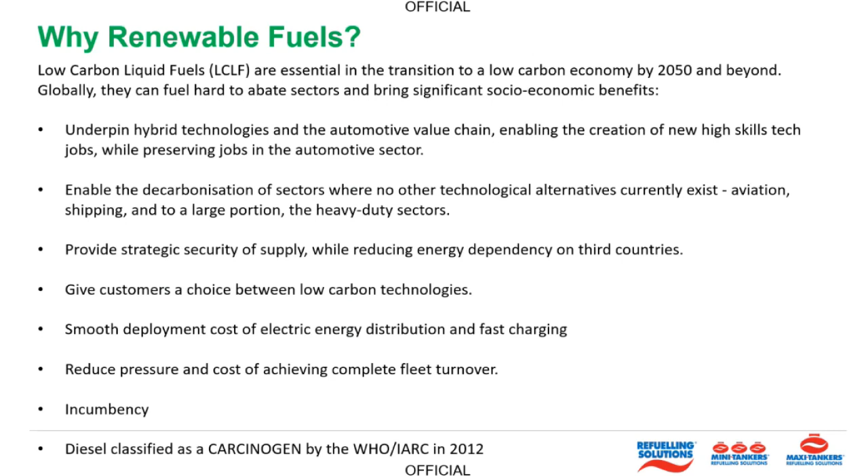I think we know what biodiesel is. It's not straight vegetable oil or used oil. Biodiesel today, although it may be made by some backyard enthusiasts and unregulated, the poor quality units of the past are long gone. Australia has 3 local biodiesel manufacturing facilities in the country, and that's a small percentage compared to the diesel users.

The historical issues with biodiesel have been inconsistent and multi-feedstock, so the quality of the feedstock is crucial to a good end product. There was a distinct lack of quality control. There was no adherence to the fuel standards or OEM support for inferior quality, and rightly so. And initially, biodiesel that was made in Australia or used in Australia resulted in filter blockages in cold temperatures, fuel efficiency issues, and power loss issues.

So the process of biodiesel manufacture was transesterification, and that's the most common form of biofuel used in the US and Europe as a replacement for diesel. It can be used as a fuel for vehicles in its pure form, but it is usually blended to reduce levels of particulates, carbon monoxide, and hydrocarbons. And although there are an increasing number of OEMs, original equipment manufacturers, supporting the use of B100 in their equipment, that's still a small percentage of manufacturers globally.

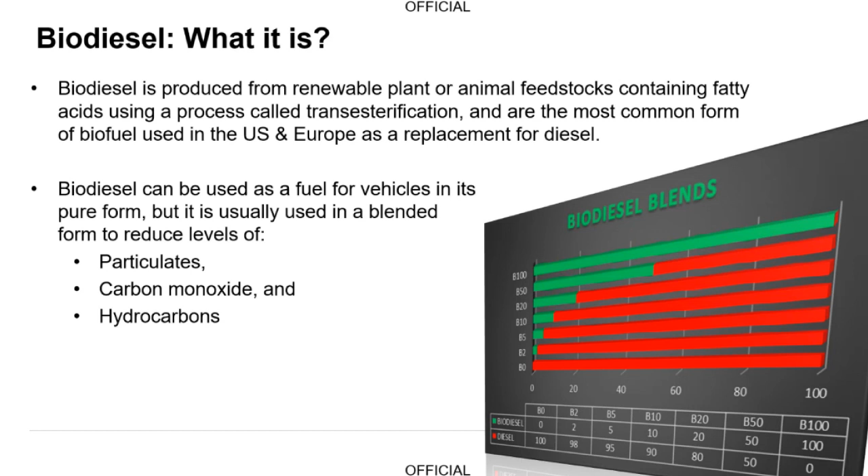The consistent message is that all diesel engines manufactured globally will run on a 5% blend, and then there are increasing percentages that are coming up to a 20% blend, depending on, once again, the quality of the product or the type of feedstock that's being used.

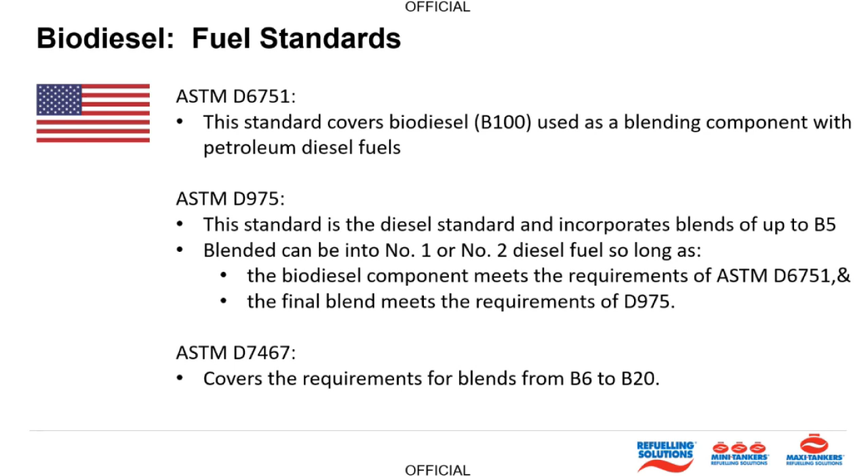Biodiesel fuel standards: traditionally it's the ASTM D6751 that covers the B100 that's made for blending with petroleum diesel, and the next standard, the D975, is the standard that incorporates blends up to 5%, and the third one covers the requirement for blends from B6 to B20. Now that's an American standard, and our Australian standard is essentially a combination of the ASTM and the EN 14214 European standard.

BQ 9000 is a quality accreditation. It's particular to the United States and Canada, and that's open to any biodiesel manufacturer, marketer or distributor as a proof of quality or a quality assurance.

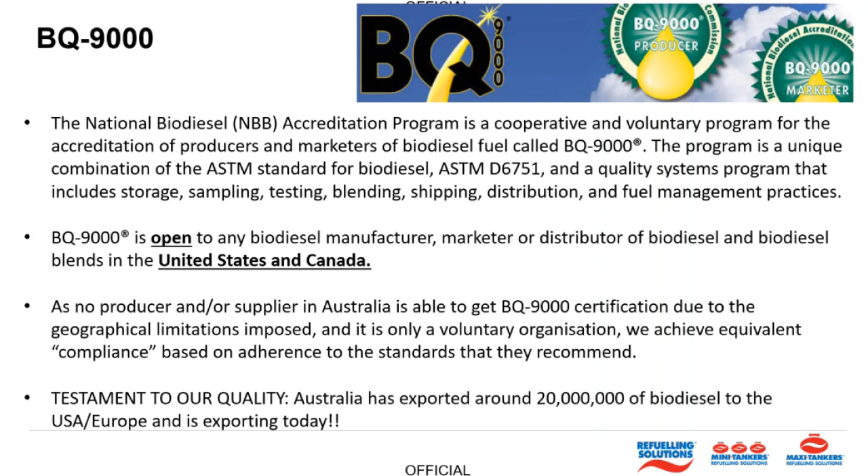There's no BQ 9000 in Australia, and yet the manufacturers adhere to those standards and have that inherent quality control anyway. The fuel standard there is the EN 14214. That's the European standard. So as I said, our Australian standards, that's the Australian standard, which is the Fuel Quality Standards Biodiesel Determination 2019, and the Fuel Quality Standards for Automotive Diesel Determination.

So in summary, that B100 that is supplied in Australia as part of the B5 blend, and that our Australian standard allows for 5% biodiesel in all diesel sold in Australia, providing that B100 conforms to the ASTM D6751 and 14214.

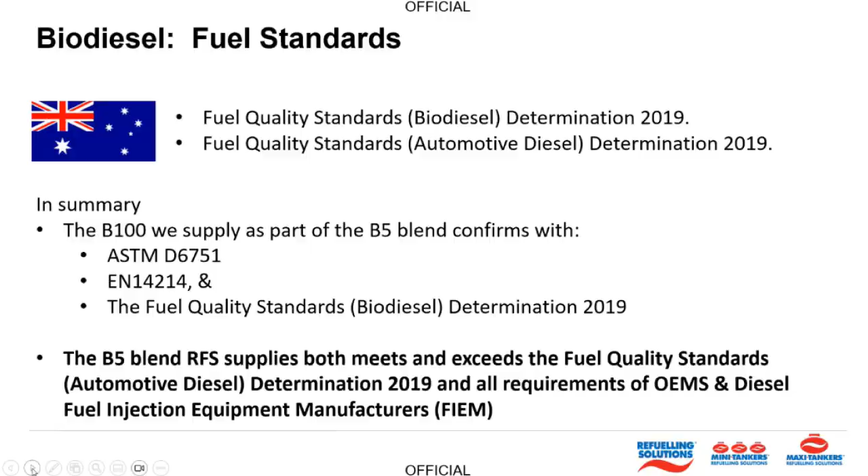So the B5 that is manufactured or we supply in Australia both meets and exceeds the fuel quality standards for straight mineral diesel, and is considered, for all intents and purposes, exactly the same as your standard diesel. And that's the actual Commonwealth document that shows that 5% in that standard.

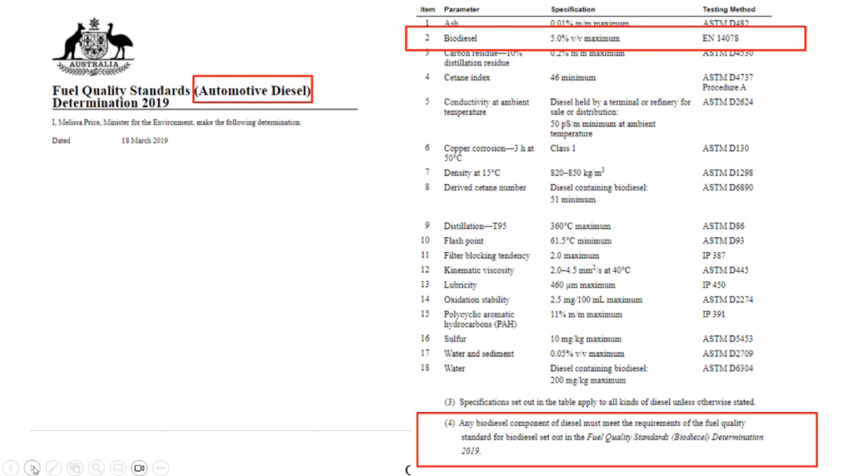Essentially, there is a biodiesel handling and use guide that is adhered to in Australia, and quality is far superior today than what it was 15, 20 years ago when the industry was in its infancy. I think we all know the benefits of biodiesel, and that it does improve air quality. It addresses climate change by reducing greenhouse gas emissions.

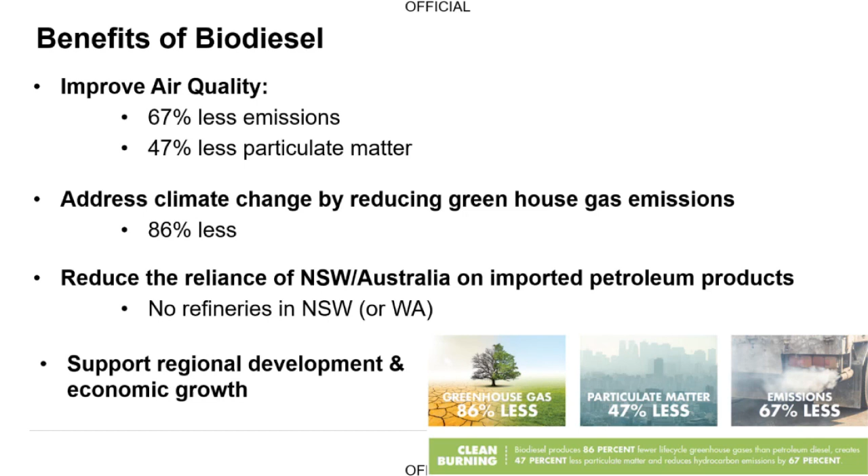And importantly for Australian agriculture and manufacture is that if we can produce any percentage of low carbon liquid fuels in Australia, we are reducing Australia's reliance on imported petroleum products. There has been a vacating of the manufacturing industry throughout Australia generally, but with the fuel, if we can have some fuel security in Australia by supporting local manufacturing of a bio-based fuel from varying feedstocks, and that's forever evolving, that will also support regional development and economic growth.

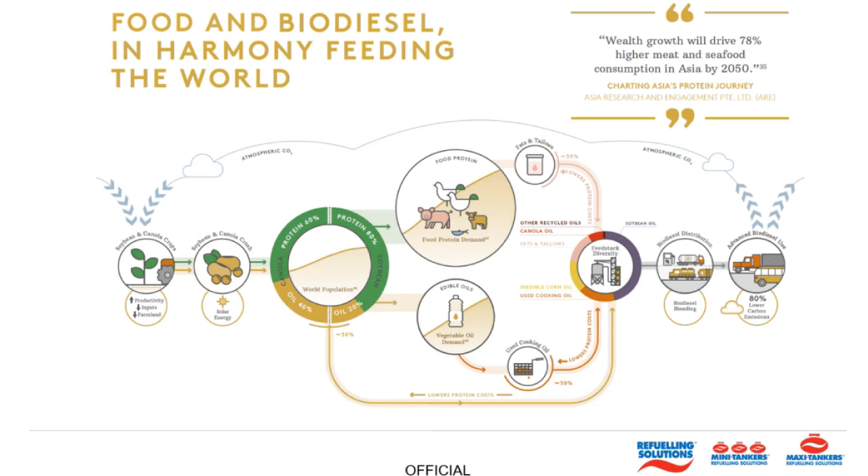The argument of food versus fuel has been one that's been around for the last 15, 20 years and will continue to do so. And we're not advocating that we use food crops for energy crops, and whatever feedstock is used for energy has to be sustainable. So it depends on both the ratio, whether the feedstock is from marginalised cropping areas, land, or new technologies like algae, for instance, or a combination thereof. You can actually have food and fuel, as a replacement for the mineral diesel that the world is now pivoting away from.

Okay, proven performance. We are now seeing, with the advent of renewable diesel, that's HVO, hydro-treated vegetable oil, it's one step up from the initial biodiesel offerings that were made 15 or 20 years ago. HVO is chemically indistinguishable to mineral diesel, and it has the same proven performance. And biodiesel itself has improved dramatically, and it also has almost the same performance as the mineral diesel, unlike the initial offerings in the past.

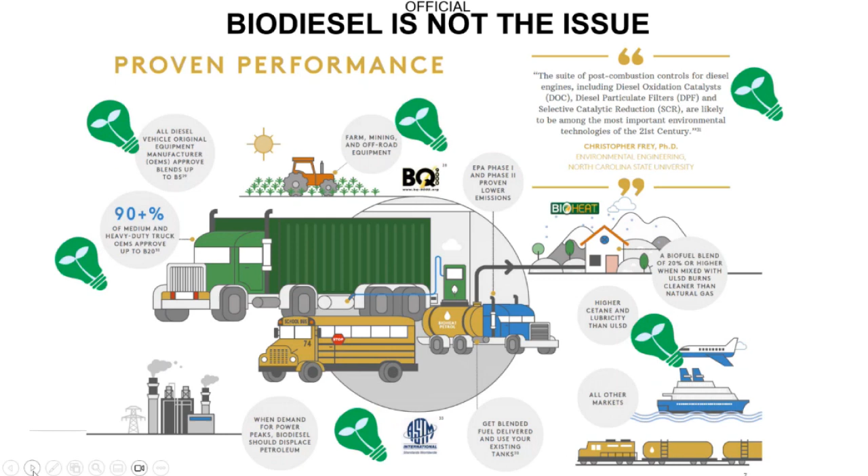Current producers in Australia, and there are 3 only, with a capacity as you can see on the slide: Ecotech, based in Narangba, Queensland. Scanline are based at Rutherford, in the Lower Hunter, New South Wales. And Just Biodiesel based at Barnawartha, which is just over the Albury-Wodonga border.

There's a combined total of 105 million litres against a current consumption in Australia of, I think it's 32 billion litres of diesel. So we'll never be able to have enough bio-based liquid fuel to replace the consumption of mineral diesel in its current form. However, on the road to decarbonisation, as newer technologies take place, we can still utilise a lower carbon alternative in a blend or straight to help that journey along.

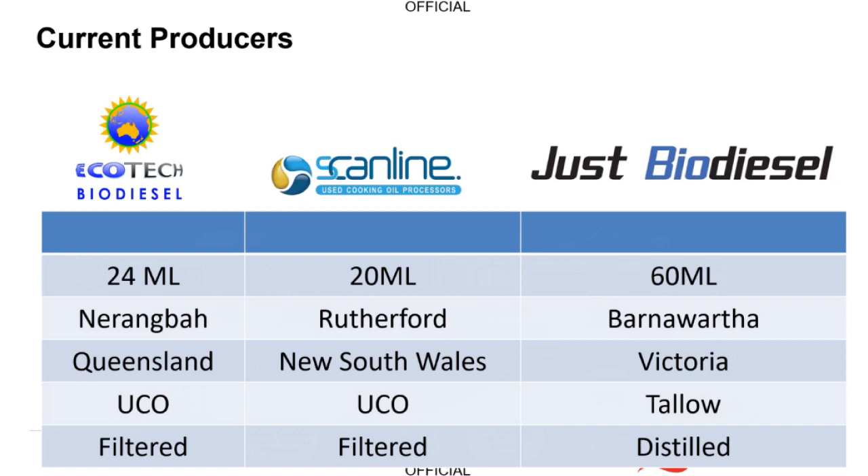Currently, Refuelling Solutions, we started importing renewable diesel, or Neste My Renewable Diesel. The first import was from Finland, where it was manufactured, and currently we're importing it from their refinery in Singapore.

And the silly point of this, well, I find it very frustrating, is that the renewable diesel that we're now bringing into the country and advancing as a solution, or as a part solution to decarbonisation, was made from feedstock that Neste procured in Australia, took overseas and manufactured and sent it back. We brought it back into the country as an end product.

Australia has the innate capability and conditions to manufacture from a variety of feedstock into its own renewable diesel, and that really is the end game in my view, and obtaining support, both regulatory support and state and federal support for both investment, and incentivise those to invest to manufacture an Australian homegrown product, bio-based product for consumption in Australia, and also incentivise end users for using that. And that's where the sticking point has been.

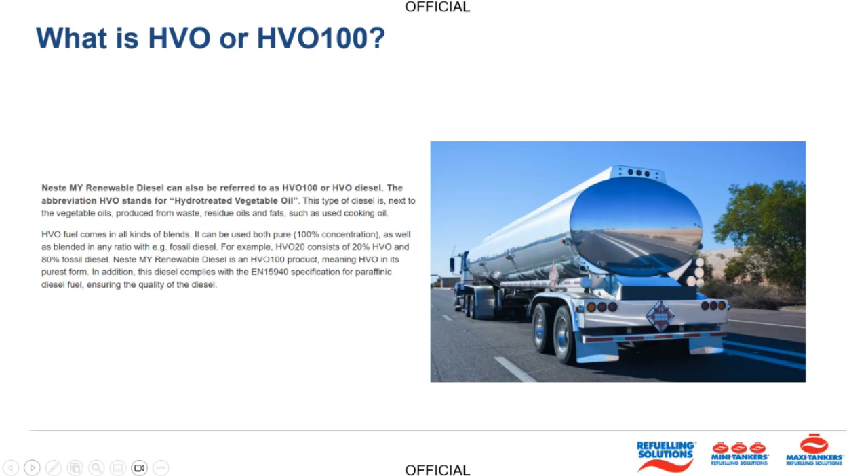My hope and desire is to see Australia become maybe not self-sufficient in a low carbon liquid fuel, but certainly go a long way to gaining some security and foster a new industry. We can manufacture, we can produce the product, and it will play a role as one technology on the road to decarbonisation.

The benefits of HVO: emissions can be reduced by up to 90% over the fuel's life cycle compared to fossil diesel. I guess that changes when we're importing it from Finland or from Singapore by a vessel that's using mineral diesel, but that life cycle analysis will apply if we're manufacturing in Australia. Certainly helps tailpipe emissions in a mining situation or a closed room generator type at the bottom of a building. Air quality is improved.

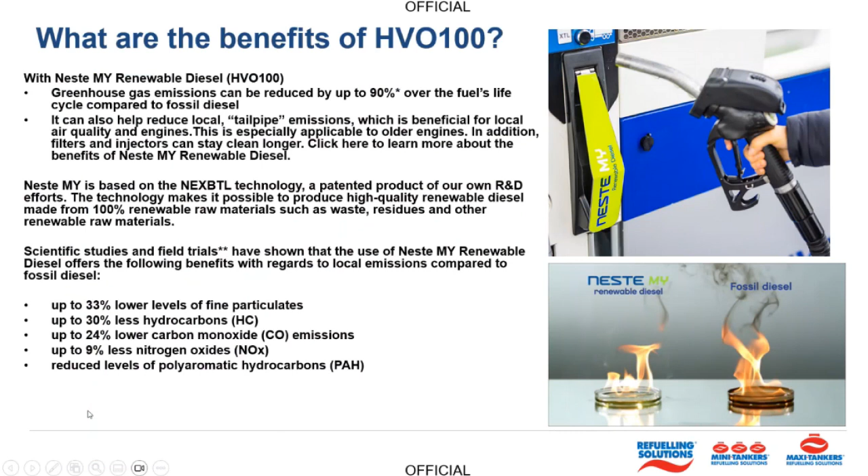HVO or biodiesel itself is not considered a carcinogen, as is straight diesel or the fumes from burning that. Yeah, there it is. You're welcome to have this presentation to go through the numbers on the fine particulates, the hydrocarbons, NOx, CO reductions, and the polyaromatic hydrocarbons that are reduced.

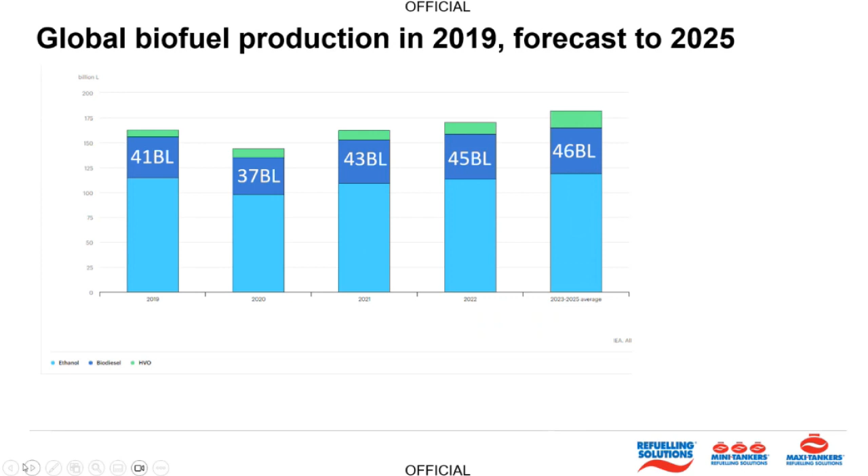Global biofuel production forecast to 2025. As you can see, the industries have developed over time, and there is still capacity to increase that substantially. Production and the drivers. In the States, the renewable fuel standard has been adopted. California has a low carbon fuel standard, LCFS, and there's even greater, not restrictions, but requirements coming to that.

Blenders have a tax credit for manufacturing and a blending requirement to provide a sensible blend, or at least make that available for those that want to contribute or use the product. And there's also an incentive for converting fossil fuel refineries into manufacturing hubs for LCLF, low carbon liquid fuels.

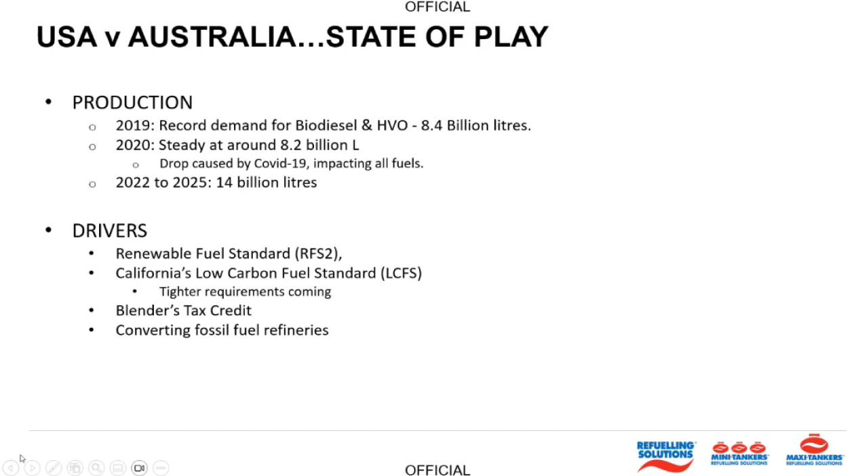Yeah, that's just basically a feel-good: bio-based diesel, such as renewable diesel and biodiesel, are available now. Let's clear the air, pun intended, obviously. They are renewable, clean burning, and they're replacements that are reducing Australia's dependence on foreign petroleum. And if we can get that manufacturing up and running in Australia on a much stronger and greater level than it is now, it creates local jobs and economic growth, and we're doing the right thing by the environment as well.

Last slide. That's, would you like fries with that? Yeah.